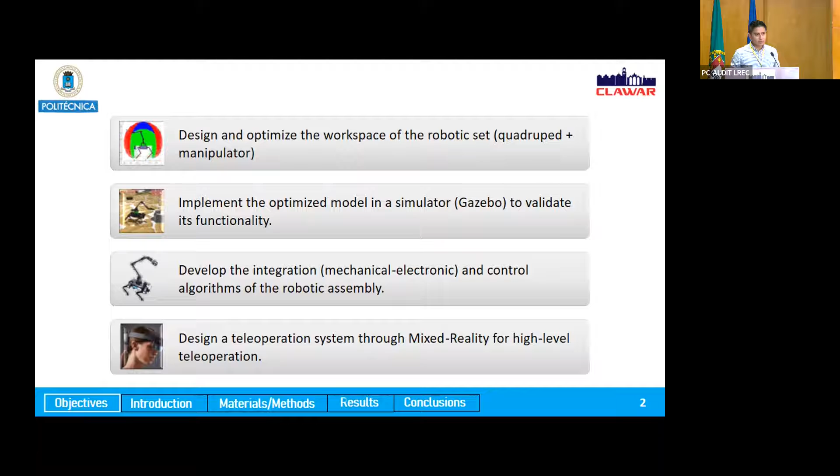As objectives of this presentation, first, to design and optimize the workspace of the robotic set, the quadruped and the manipulator. Second, to implement the optimized model in a simulator. In this case, we used Gazebo because it allows us to evaluate different kinematic and dynamic parameters. Next, to develop the integration, the mechanics, electronics, and control algorithms for the robot assembly. Finally, we have the design of the teleoperation system through mixed reality for high-level control.

Within the state of the art, in recent years there are new works developed with quadruped and manipulator robots, such as in these cases. These articles were presented previously in some conferences. The first two cases use the ANYmal platform, and the last case is the Boston Dynamics robot.

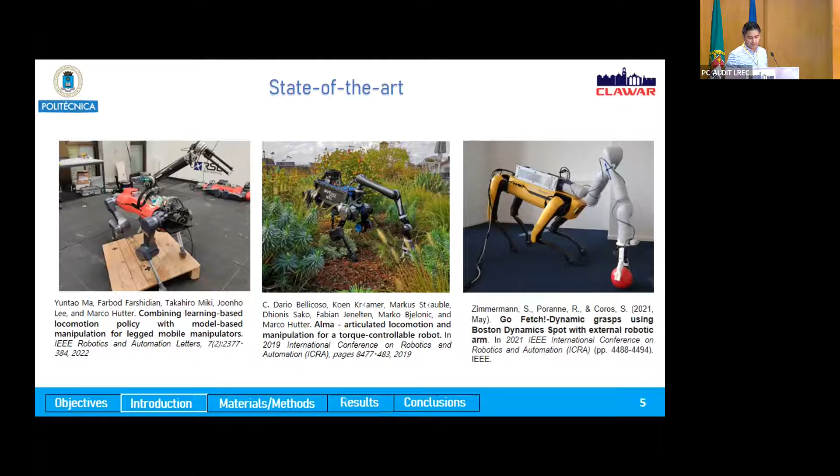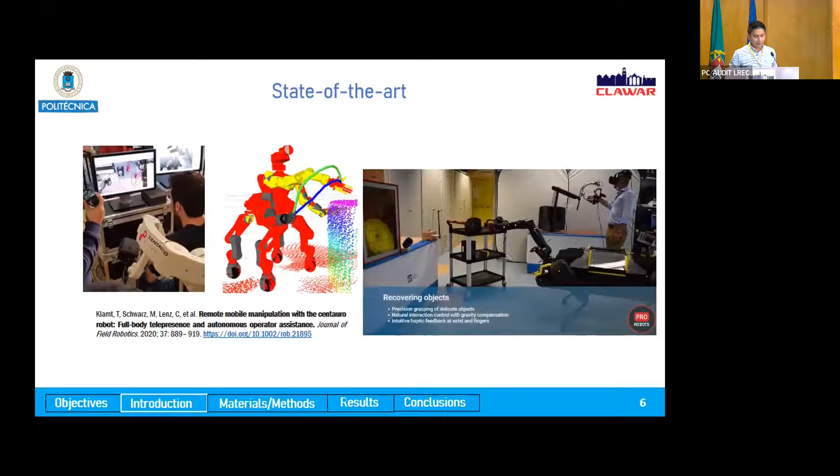Regarding teleoperation, also in the state of the art, there are some works that addressed this topic. For example, an Institute of Technology presented its new teleoperated robot at the ICRA 2021 conference. The robot combines the strength and power of its predecessor and uses a virtual reality system to teleoperate the quadruped manipulator robot.

Within the state of the art, there is a great exponential increase in research on quadruped robots for search and rescue, such as in the DARPA Subterranean Challenge. In recent years, some teams implemented quadruped robots for mine exploration, as in last year's DARPA challenge.

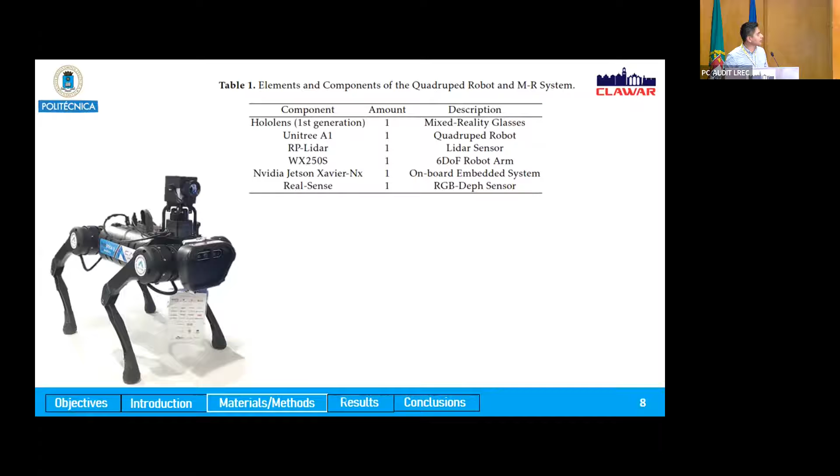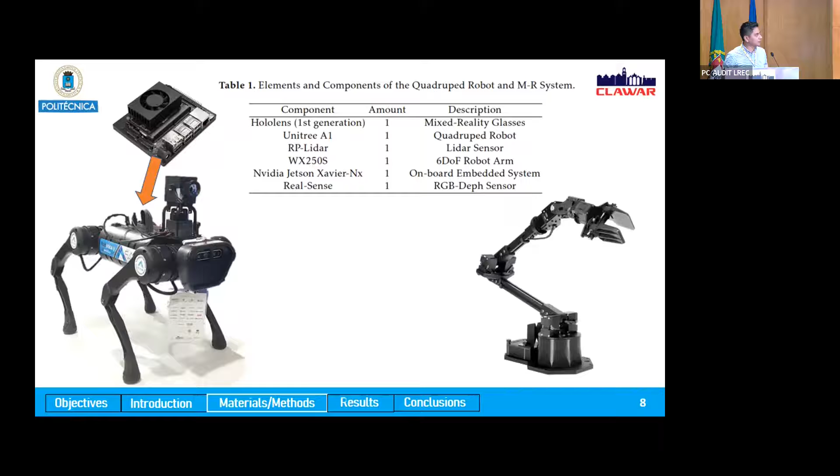For this work, we used these elements for deployment of the system. The platform used was the Unitree A1, and this robot's name is Arthur, standing for A1 Rescue Task UPM robot. It has different sensors, including an RGBD sensor and a laser sensor, and for data processing we used a Jetson Xavier. The robotic arm was the commercial Trossen Robotics arm with 6 degrees of freedom, a payload of 300 grams, and a weight of 3 kilograms. For teleoperation, we used the first generation HoloLens from Microsoft.

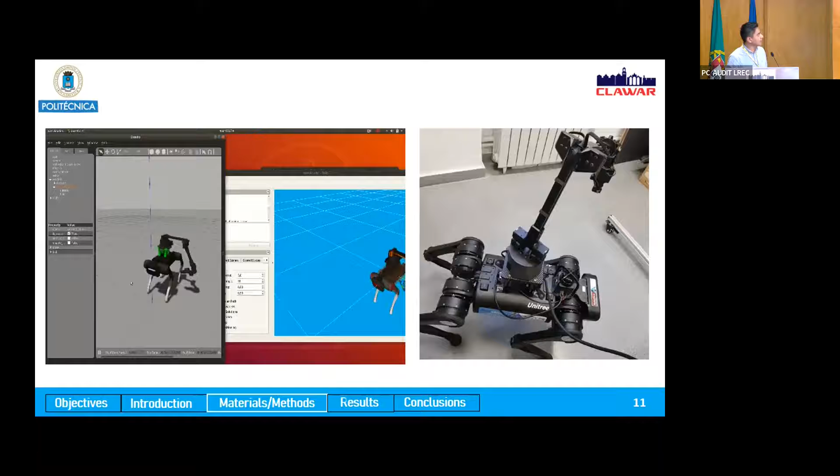We use MoveIt to perform collision-free trajectories. Here we are giving a point to the end effector, and we can see how MoveIt performs the collision-free path, and how it moves in Gazebo. Here we can see the movement in the real robot with other points.

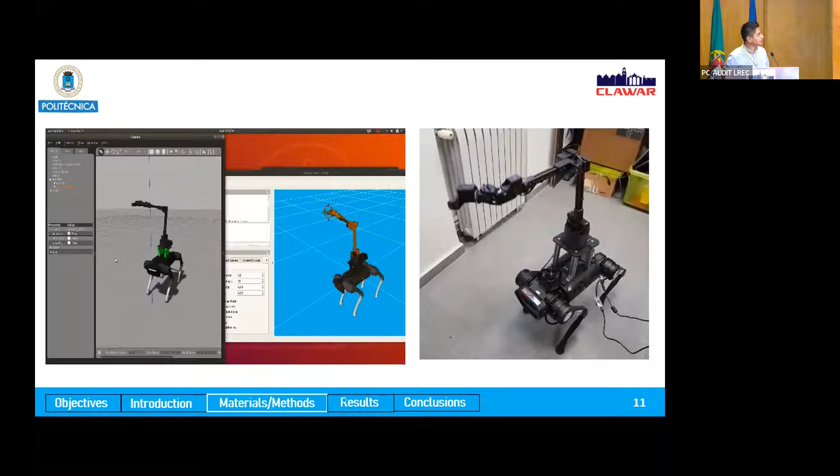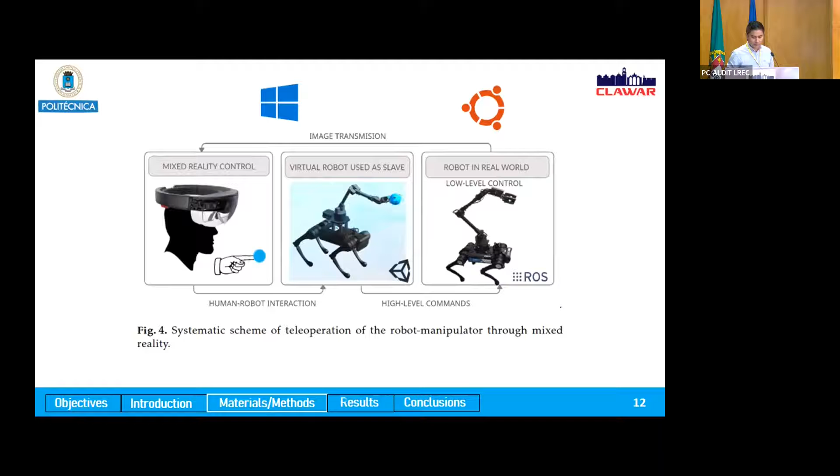And finally, to control this at a high level, we have implemented the teleoperation system. In this case, we use the software Unity for the interface. We place the virtual model with a control in the end effector, a blue ball that the operator is able to manipulate. These commands of the articulation are sent to the low-level control in the real robot.

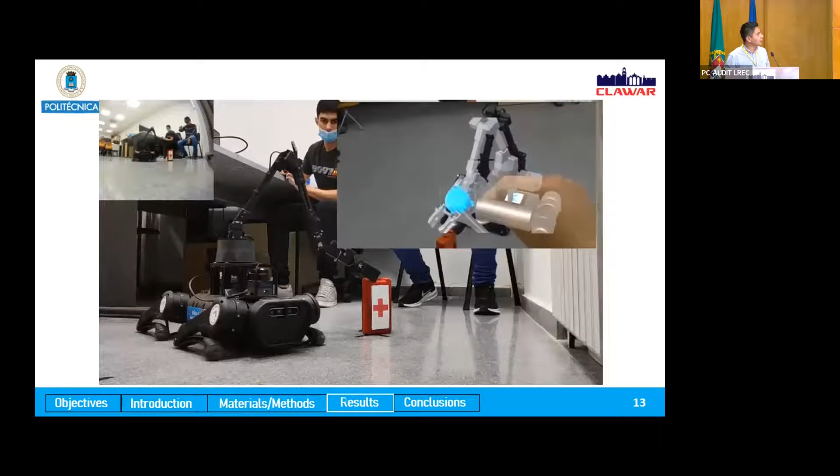That is in ROS Melodic. Here we can see how the system functions. We can see the first-person view of the HoloLens and also an external view of a GoPro camera. This is a task of pick and place where we train the operator to take an object and transport it to another one.

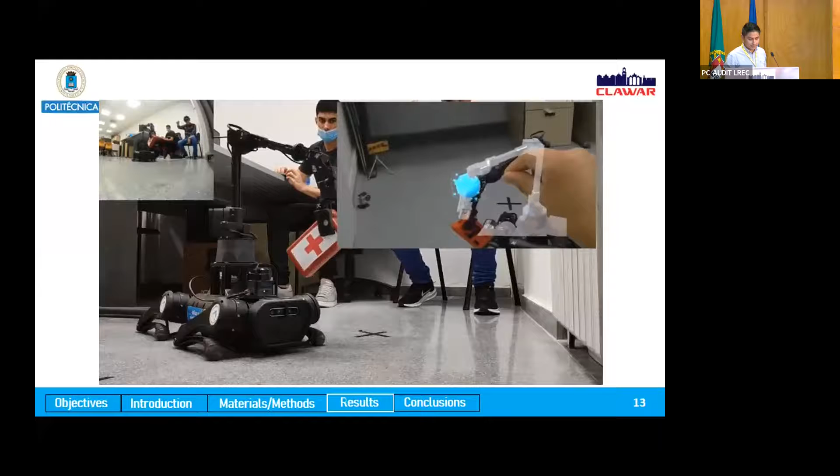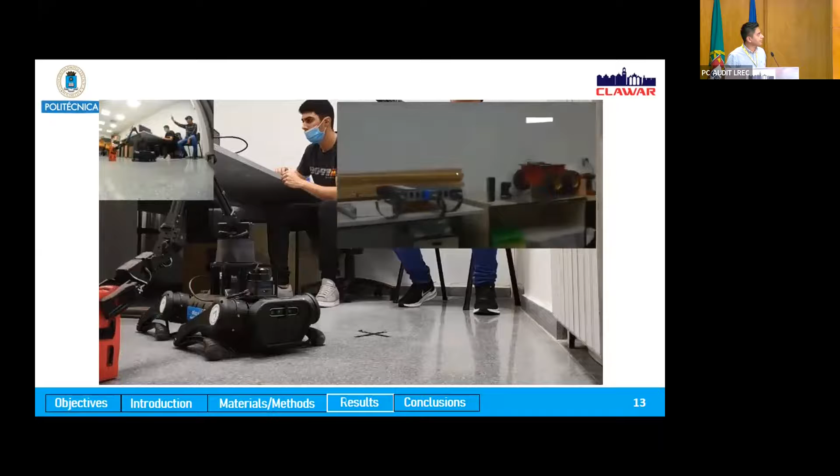After that, we have performed different tests in laboratory sets that allow us to validate this method. The video is a little long. The interface also has different buttons, such as predefined positions, like home, sleep, or other positions to transport the objects.

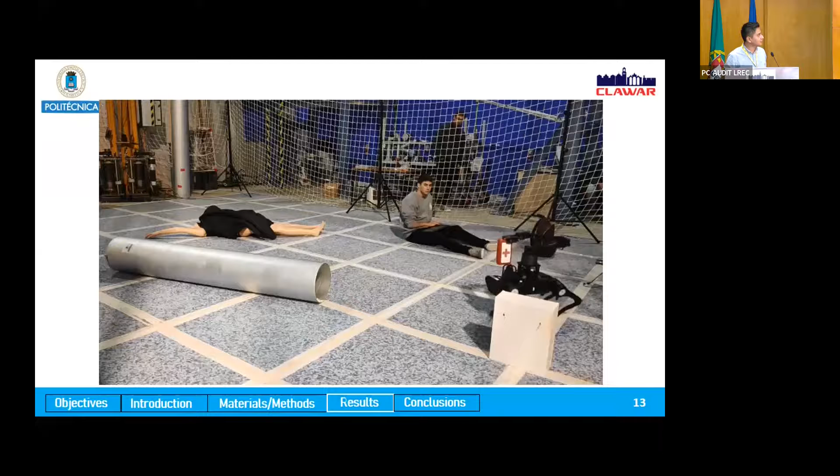This is another site where we make some tests. And finally, to validate or implement the method, we have contrasted this with a conventional one. This is a conventional interface where we have the image transmitted and the position of the robot, and we use the mouse to give some points to move it.

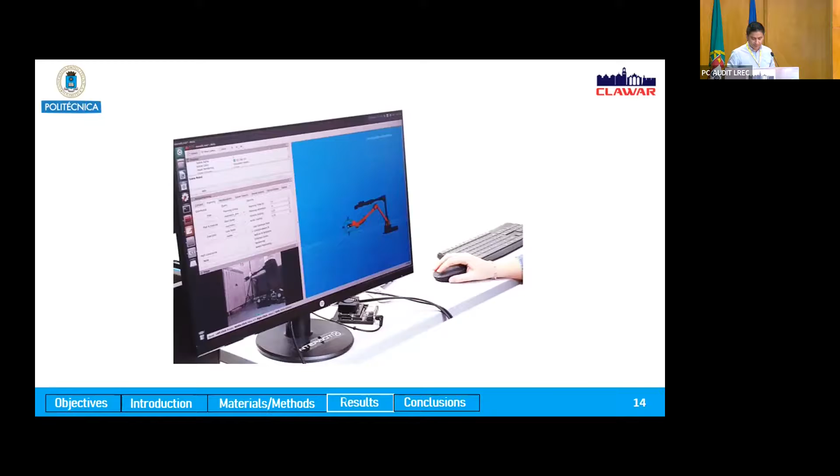In the evaluation test, the persons who did this test say that they have a preference for the mixed reality interface because they have a first perspective of the task, and it motivates the decision making.

And also the efficiency based on training shows that at the beginning, if a person doesn't have any kind of experience with these interfaces, it is not good. But after some training, it becomes better to perform any task.

Finally, as conclusions, the implementation of the Quadruped-Manipulator joint kinematic modeling in MATLAB has allowed calculating and optimizing the work area.

And also the ROS simulation environment has shown great potential and utility to represent conditions and integrate the model design. And the mixed reality interface versus the conventional interface has shown great potential, mainly in the increase of operator confidence.

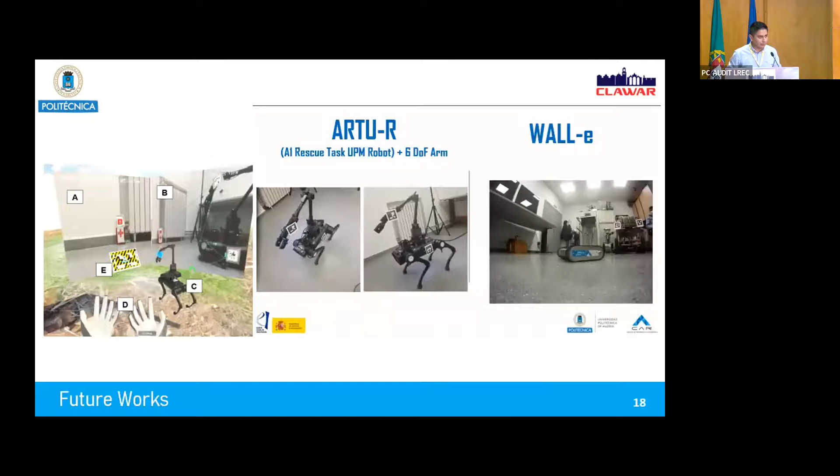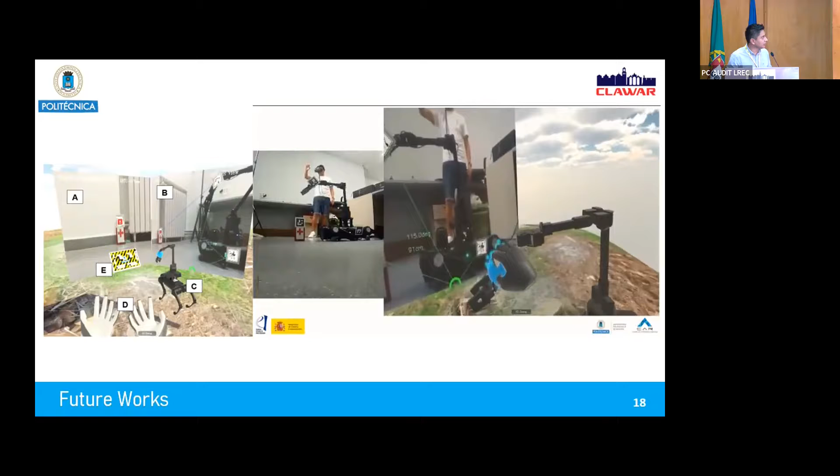And regarding future works, we are now working on collaborative perception. Here we use a virtual reality environment to do this task, but we have feedback of the image transmitted by an external robot that gives us the perspective to approach the task.

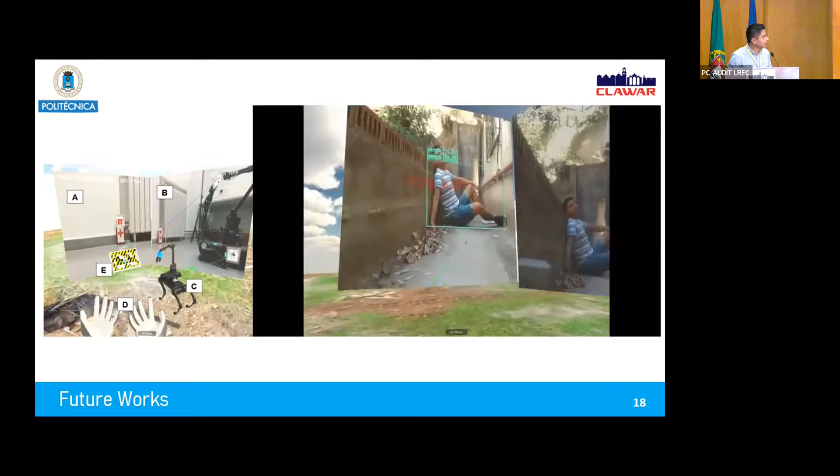This is an external test. The operator takes a first data, and after that, it identifies a victim using a neural network and goes to rescue the victim.

Thank you so much for your attention.

Do you have any question? Yes. Is there any question? No one? Okay, I have some ones.

First, have you evaluated the latency between the robot communication and the mixed reality system? Yes, we have evaluated that, and at this moment it's not in real time because we have communication with a network or with the HoloLens. It has a 2.4 gigahertz communication, and the robot is with a 5G network, so we have to use a converter. For that, we have only developed small movements between the glasses and the robot arm.

Okay. And how have you set the reference for the simulation, the reference joint for the motion of the robot in the simulation? Yes, as I said, we have predefined positions. We start from that, and then we receive and transmit the position to get an estimation of the position in each moment.

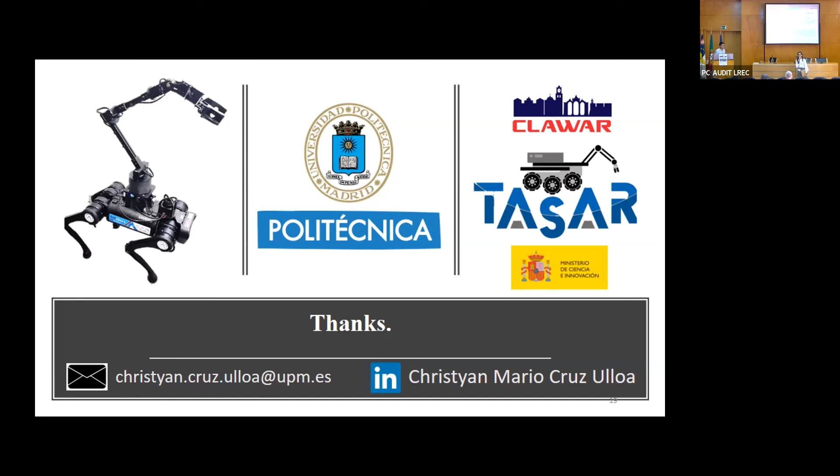Okay, thank you. Thank you so much. Thank you for your time. So let's thank you again.